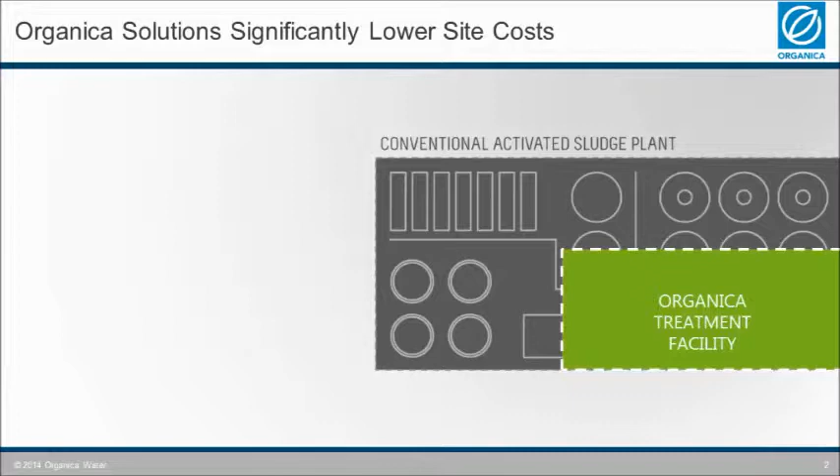It starts with the fact that one of Organica's biggest advantages is a much lower physical footprint. The whole treatment facility is built as a single unit, efficiently housing all unit operations within. Just imagine that in place of building multiple smaller houses, the objective is to build a single large one, slightly larger than the multiple units you would have across the site.

Organica is probably the only wastewater solution provider that employs architects trained in the field of wastewater treatment. This group of people who are part of the application engineering team at Organica are constantly improving the location and the arrangement of all unit operations within the single structure to reduce the cost of construction.

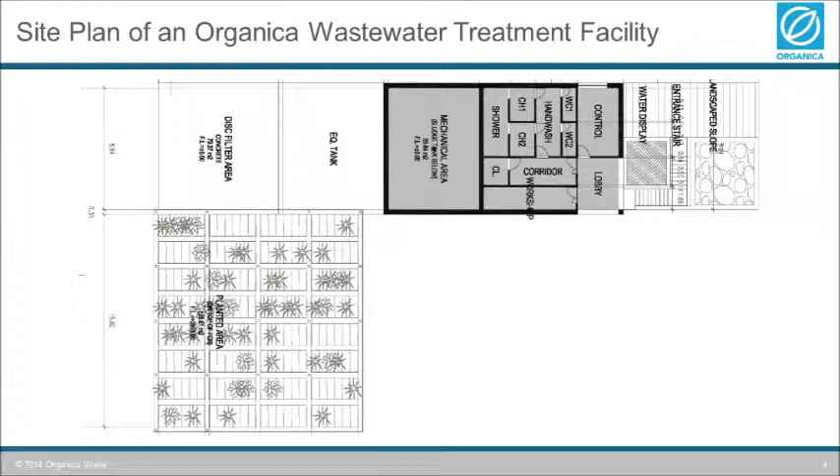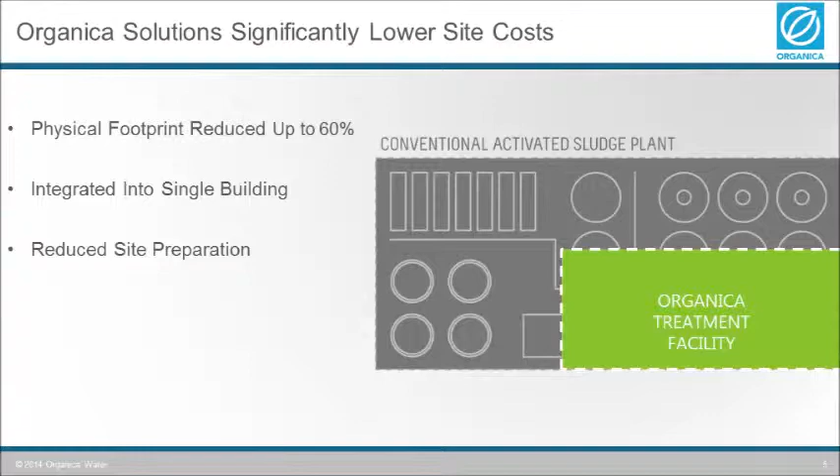Due to the lower physical footprint, the first direct saving is made in having a smaller perimeter for site preparation and excavation works. Almost all the concrete and masonry walls in the single structure are common with another tank or room. Besides the direct advantages resulting from these two savings, it also implies a shorter time period for construction and therefore savings in site costs. Well, the good news is that it doesn't end here.

It just gets better as we take a look at the various unit operations within the wastewater treatment facility. Now, since the FCR, unlike suspended growth and hybrid systems, only relies on attached biomass on its natural and engineered media, the return activated sludge, popularly known as RAS system, is not required in the Organica solution. That is one unit operation less in the whole system.

Secondly, due to the significantly lower suspended solids in the biological reactors, there is no need for a secondary clarifier in the Organica solution, as the effluent from the biological reactors can be sent directly to Organica's scallop disc filters.

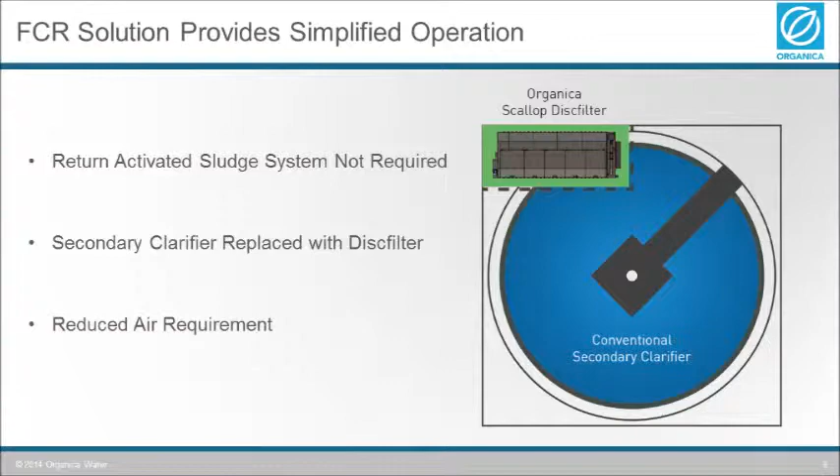Thirdly, owing to the lower air requirement to achieve the desired level of dissolved oxygen in the reactors, the complete aeration system in an FCR is about 20 to 30% smaller, thus allowing savings in mechanical, electrical, as well as installation costs. Again, due to the compact layout, pipe and cable lengths in an Organica facility are simply shorter, reducing both the material as well as installation costs.

For removal of nitrogen, the FCR does not use the cumbersome mixers in anoxic tanks. Instead, the hydraulic mixing is achieved by strategically located air diffusers below the engineered media.

Last but not the least, as the size of the facility becomes bigger, it is normal for the distribution boards to start spreading at various locations on the site in a conventional system. However, in an Organica facility, there are hardly any distribution boards across the whole facility for any electrical or automation system due to the compact layout and shorter cable lengths.

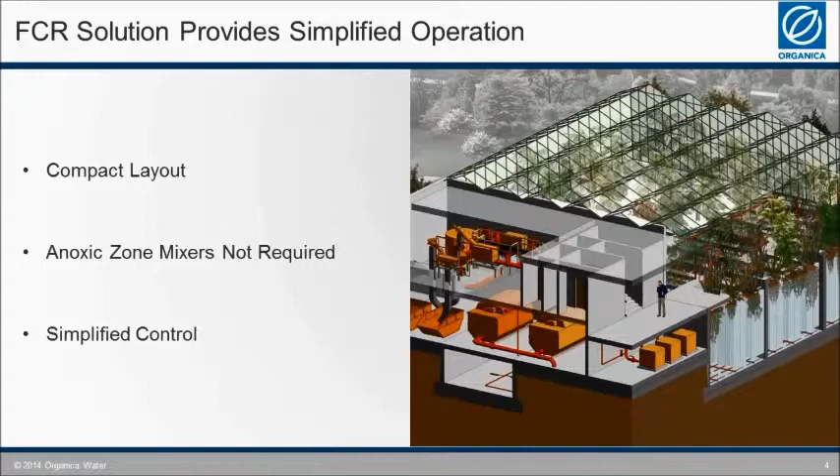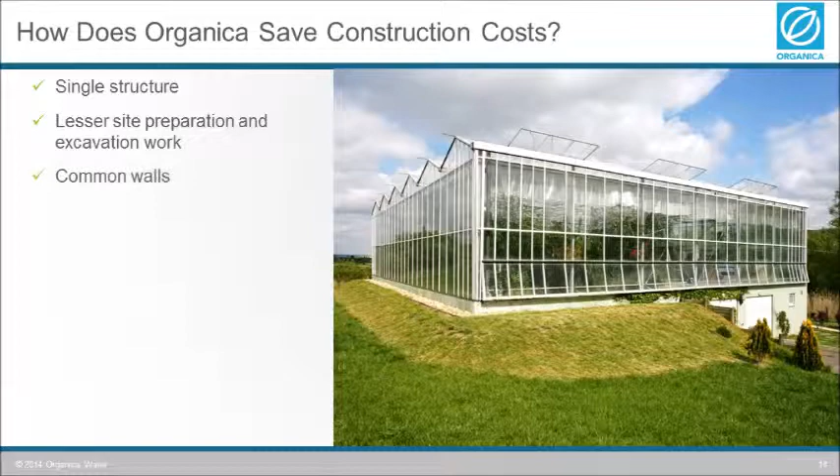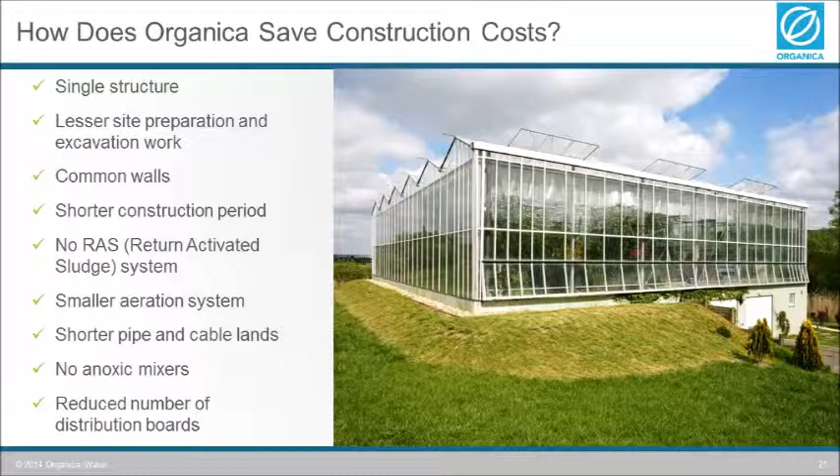So folks, to summarize, the main reasons why Organica offers savings in construction are a single structure in place of multiple ones, less site preparation and excavation, common walls, shorter construction period, no RAS system, a smaller aeration system, shorter pipe and cable lengths, no anoxic mixers, and either none or a lower number of distribution boards across the facility, which at the end are topped by the satisfaction the construction crew derives after building a beautiful wastewater treatment facility.